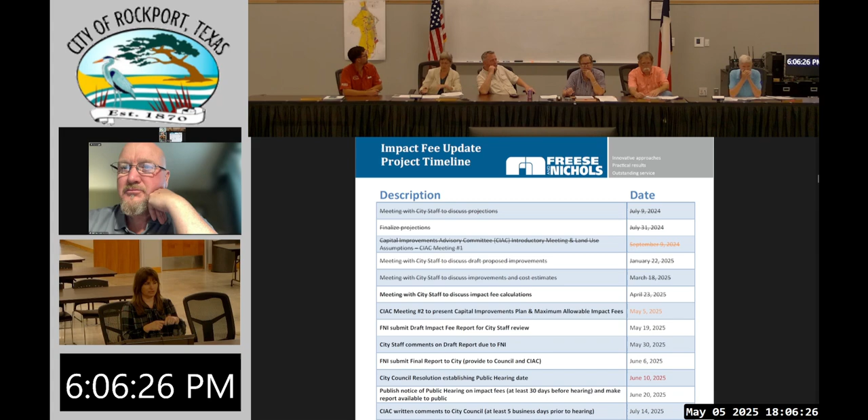To go over the water and wastewater update for the impact fees. If you want to jump to the next slide, that's our agenda. I'll give just a brief review of what we discussed in the last meeting, talk about the capital improvements plan, go over the impact fee calculations, and then finish up with the next steps and project timeline.

So just some basics for those that weren't here. Impact fees are a one-time charge assessed to new development for the cost of anything associated with new or expanded infrastructure. Impact fees cannot be used for any kind of maintenance or operational costs. It all has to be for increasing capacity of the system. Impact fees are developed based on Chapter 395 of the Texas Local Government Code. Those rules dictate how we do this whole process as far as the calculations and the public noticing. By law, it is limited to water, wastewater, roadway, and stormwater or drainage infrastructure. But we are only looking at water and wastewater as part of the study.

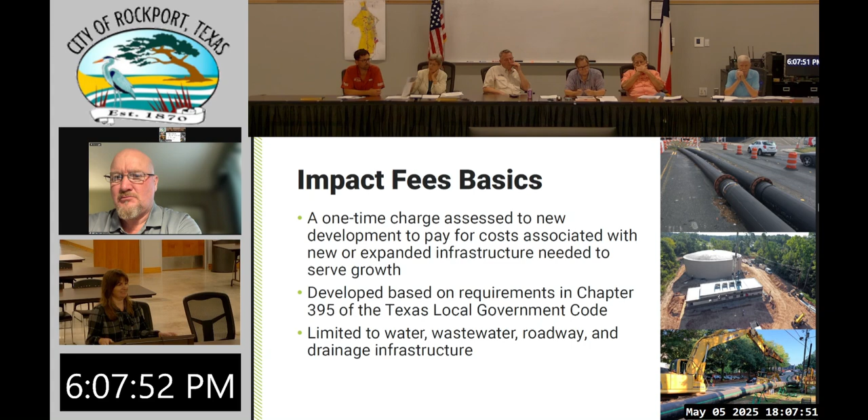Here's an overview of the impact fee process. The first step is developing land use assumptions. That's what we discussed in the first meeting back in September, where we establish our existing customer base, estimate our growth over the next 10 years, and use that to determine our water demands and wastewater flow projections. The next two steps, the capital improvements plan and the impact fee calculations, are what we're going to get into in more detail tonight. That's where we utilize those land use assumptions to determine what projects are needed to accommodate the growth in the water and wastewater system over the next 10 years. For the impact fee calculations, we look at how utilized each of those projects are on the CIP, determine our living unit equivalents, and then calculate what's called the maximum allowable impact fee. So that's all the technical part of the process.

The last two steps are stakeholder meetings. We've had various meetings with city staff to go over projections and CIP. We have these two advisory committee meetings; this is our second one tonight, and then we will do a council presentation as well. We have a public hearing where we have to notice for 30 days, and then we'll have 2 readings of the ordinance to get everything updated.

That's the process. And a reminder of your role as the Impact Fee Advisory Committee. It's really just to oversee the development of impact fees. That's why we're here presenting. You can review the preparation of our land use assumptions and capital improvements plan, and ultimately provide written comments to council. Those are due at least 5 days before the public hearing. So we can track all the comments tonight, and then that will be submitted. Moving forward, there is a requirement to file a semi-annual report on the progress of the CIP. So any questions on background basics before we jump into CIP?

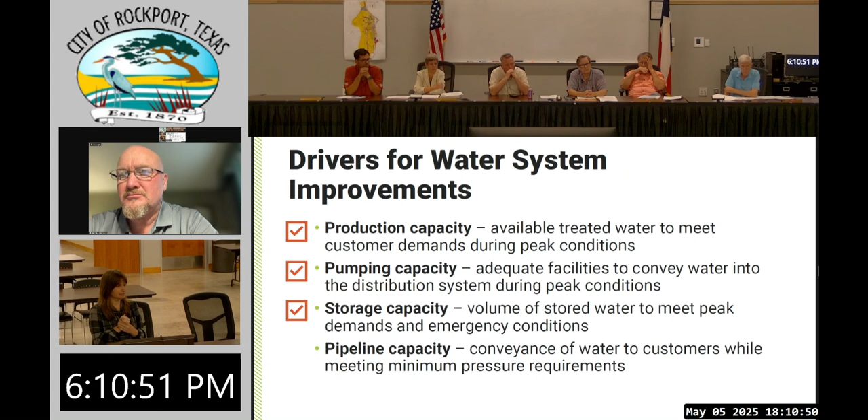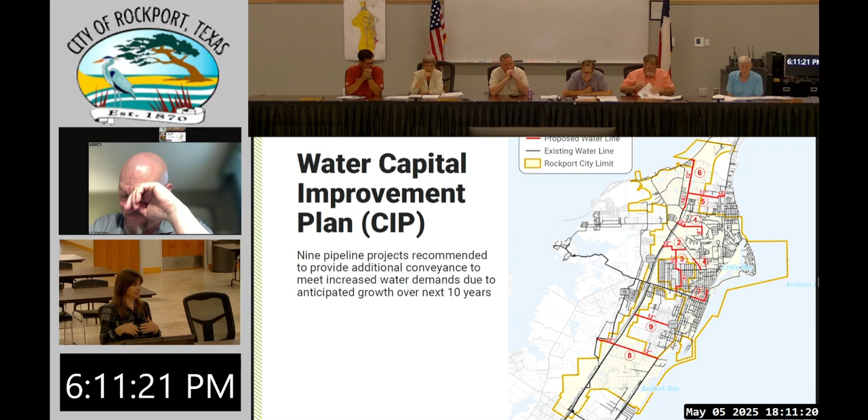So we have 9 pipeline projects kind of scattered throughout the service area, really to extend water service and to upsize some bottlenecks in the system. So we can go to the next one. We'll list all the projects. Oh, we'll get to wastewater, and then we'll go to the list of projects.

So on the wastewater side, again, we kind of looked at 3 components to determine what projects are needed. Treatment capacity, similar to production capacity, the ability to treat and discharge wastewater flows. Lift station capacity, that's when we collect wastewater at a pumping facility at a lower elevation and pump it up to a higher elevation before it can get to the treatment plant.

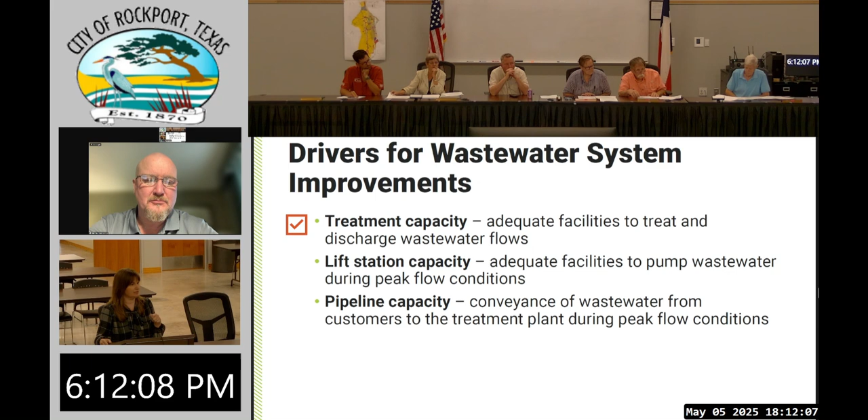And then again, pipeline capacity, so that conveyance network that gets the wastewater from the customers to the treatment plant during peak flow conditions. So you're good on treatment capacity, and you'll see our projects here that we identified are lift stations and pipelines. So again, similar map on the wastewater side. This is the existing system. Everything in kind of the black and gray color are existing facilities and lines, and then everything that's recommended or

proposed is in red. So you can see we have 3 pipeline projects, 3 new lift stations, and 2 lift station expansions that are all needed to serve that growth over the next 10 years. And really the major project is a large interceptor line running along the bypass there that is meant to collect all of the wastewater throughout that service area, so you can avoid these little lift stations that all get built and are hard to maintain.

So we did recommend this more regional type project to accommodate all of the growth in this area. So that's the major project, but there's a couple lift stations too. Yes, sir. Based on the way these are numbered, I'm assuming these are ranked in order of preference? Priority. Yes, for both the water and the wastewater system.

We tried to look at where some of those impending developments are and where the projects might happen sooner. Again, some of that development could change over the next 10 years. But we did look at, if something needs to happen upstream before the downstream project happens, we did order them in that way too. How many lift stations do we have now?

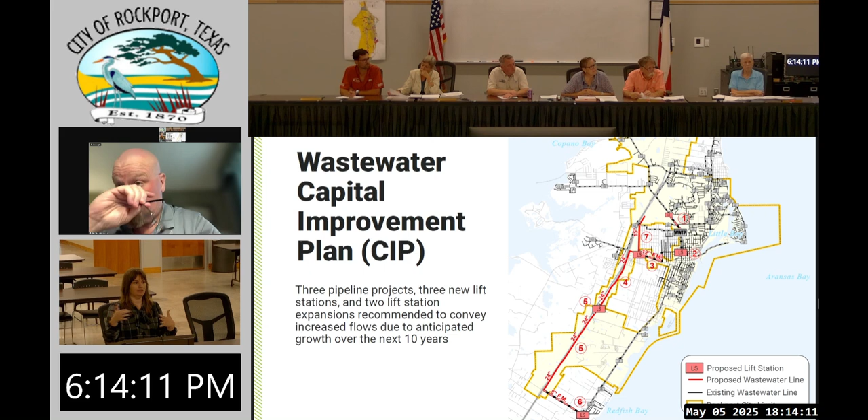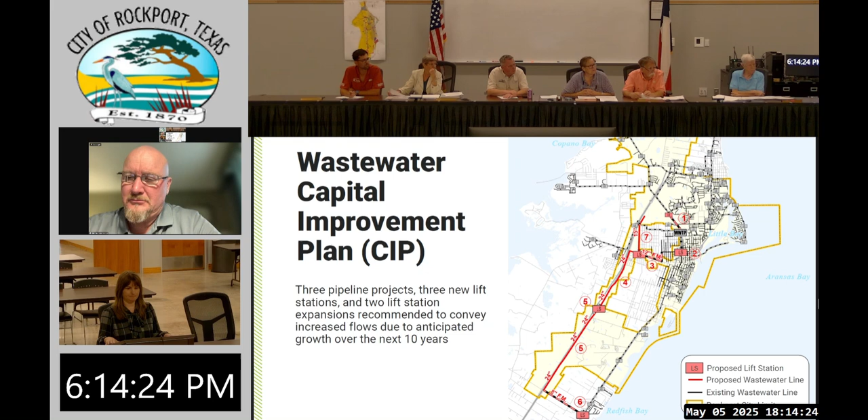And then as some of the development starts happening, because we didn't identify extensions to the specific developments, as those gravity lines come in, you could start to take off some of them depending on where all of that development starts to locate. So if infill comes in these areas, then some of those that are lift stations now can go to gravity, is the plan. Right. And eliminate some of those. Mhm. A lot. Yeah.

Stations are... When you don't have the lines for them to use gravity, you don't have a choice. Yeah, it's really hard when you don't have a lot of elevation change to use the gravity to get the wastewater flow. So you're just real flat, and when you're putting in developments, it's limited.

Before, I think we were limited to a 14-foot depth. But we're not limited to the 14-foot anymore. We can go as deep as we can go. Really? So that changes things, and that helps tremendously. There's a little bit of considerations when it comes to maintenance with how deep you go, and then initial construction cost. But we limited that line, I think, to 30 feet deep. I think 30 is what we did.

Which is still a fairly deep line, but it does kind of get away from having all these individual lift stations for every development that comes in. That's way underwater. Would have to be, yeah. Yeah, there's a lot of work that goes into it, but if we can get those depths, then we can do away with it. That'd be great. Thank you.

Yes, great questions. Anything else on the CIP for water or wastewater? I know you had in your original, for the supply for the water, that production capacity was fine. Looking at, we're coming into a historic drought again, where San Pat is limited on capacity. How are we seeing that reliance, with the other departments feeding off of that as well for a shared source? Have we looked at alternative supply?

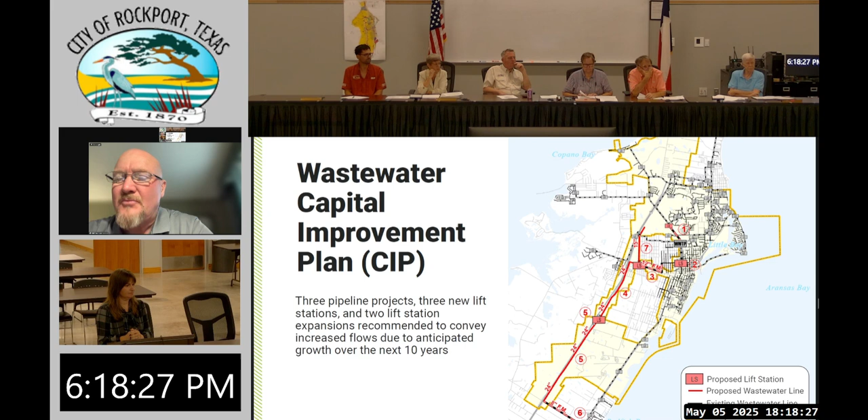Board, am I allowed to ask a question? Absolutely. Well, thank you very much. I appreciate it, and thank you for allowing me to attend via Zoom, traveling for business. My name is Matt Anderson, councilman for Ward 2, City of Rockport.

I want to make sure I understand the gentleman's comment and question, which I think was very good, about impact fees and a 10-year window. If I'm understanding it correctly, the only water supply the City of Rockport currently has is San Pat purchasing it from Corpus Christi, and we're purchasing it from San Pat. We have no wells, no treatment facility.

If something happens in that supply chain, we could be in a little bit of a pickle. Do we want to consider looking at an alternative, not a replacement, but a supplementary way of acquiring water for the residents of Rockport, be it a well with our own small treatment system or something else? And that should be allowed in the impact fee rules if we're just supplying for new development.

As a master planning engineer, yes, I would say you definitely want to look at that. That's kind of what I do every day is look at systems regardless of impact fees and what projects are needed from the various regulations. But for impact fees, it'd be really hard to count kind of a redundant supply and say that that's due to development since you already technically have the capacity there. So it would get a little fuzzy.

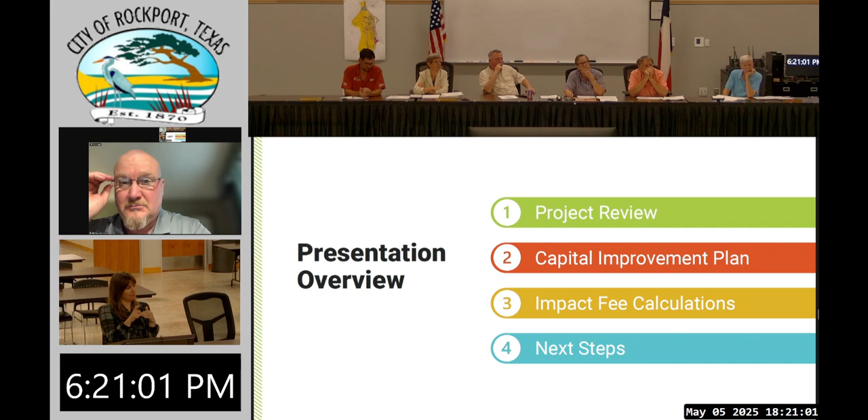if you're kind of going to go with a redundant supply. So if you have 4 MGD that's contracted right now and our maximum day demand is only 3.5 MGD, you're not really quite hitting that. But if you wanted to add another well that was another MGD or something like that, that capacity would be hard to count because you're already kind of covered by what you have existing contracted from an impact fee standpoint.

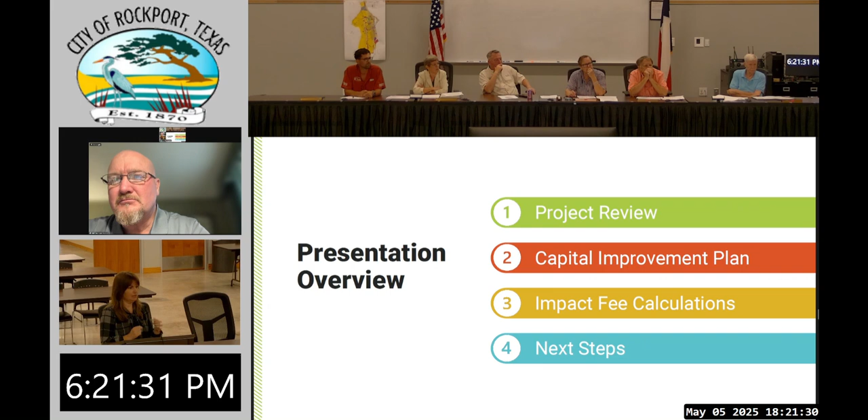From just a straight utility planning, master planning your system, I think that is very good practice, and obviously we're very familiar with different drought conditions, emergencies, things go out, even the electric grid impacts how we get water to customers. So I think overall great plan. It may not be as easy to include in the actual impact fees if you already have the capacity in your system. Not to say it's impossible, it would just take, I think, some planning and consistency on how you apply that to make sure we're being fair to existing and new customers when it comes to impact fees.

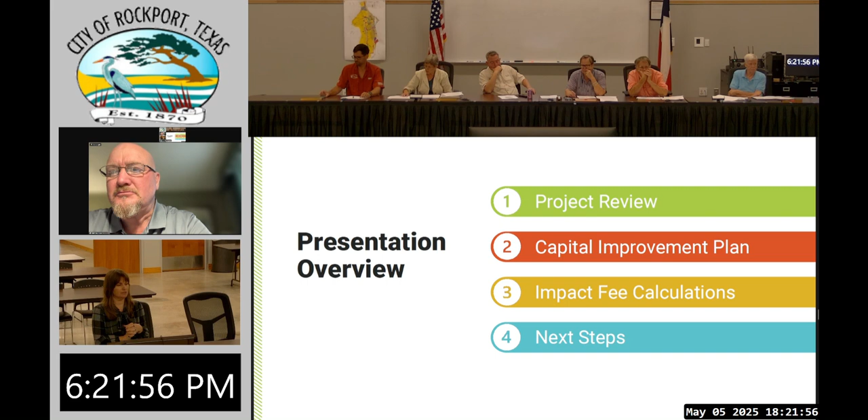All right, great questions. We'll jump into the actual calculations, and some of this might make a little more sense when we get into how we calculate the eligible project costs. So for the impact fees, we only include a portion of the project that's utilized in this 10-year window due to that growth. So we use a hydraulic model and some various planning criteria to determine the existing and future percent utilization for each of those projects that are identified on the CIP.

We also apply a 50% credit as required by Chapter 395. This credit is intended to basically capture the portion of future utility rates that will be used to pay for capital improvements. So we don't want to double charge new customers impact fees and then charge those same customers in their future water rates to pay for those same improvements. So by default, you can use a 50% credit. You can do a more detailed calculation that looks at how your rates go towards capital improvements. But for this study, we did just take the 50% credit.

And then that equation down at the bottom is the basic calculation for impact fees. So we have the impact fee per service unit is that impact fee CIP cost minus the credit, and then divided by our growth in service units. So we'll go over each of those components in a little more detail here.

For the water costs, these are a lot of numbers and kind of small here to read, but you can see our 9 projects are listed there, all of those pipeline projects. The first set of columns is the percent utilization. So we go through and identify any portion of a project that is serving existing customers, and we kind of discount that out of the impact fees. So again, we can't use the portion of a project that is serving any existing customers. It can only be for new customers. So that's what that 2025 percentage column is. Then we also look at how utilized the projects are in that 10-year window due to the growth that we've identified.

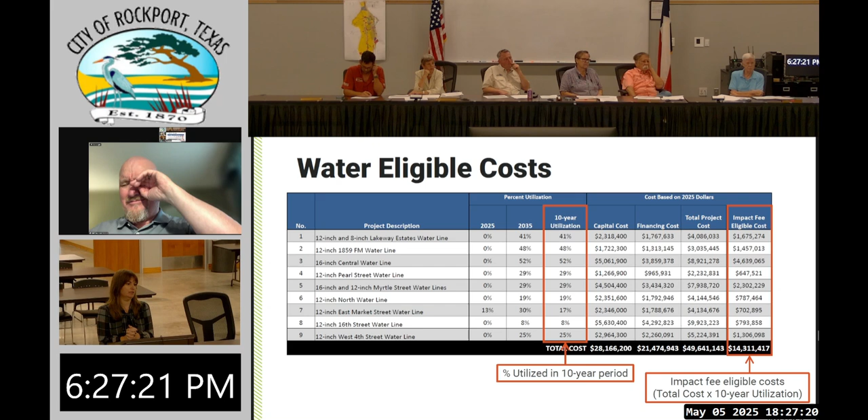I mean, there is a little bit of, I guess, subsidizing the growth, because we are doing the 50% credit, assuming that some portion of even the growth-related projects are in the CIP that the rates cover. If the policy decision is that we don't want existing ratepayers to pay for any new growth-related projects, you could do a credit calculation that basically looks at how your rates are spent and paid for, and if they go towards any projects. That would just skyrocket, wouldn't it? Right, yeah, so we'd be looking at the $49 million instead of the $14.3 million-ish.

I will say that these projects, you can see those percentages, are sized for something further than 10 years. So you can continue to collect impact fees even once a project is installed. If it still has capacity for future growth, you would still keep that on your impact fee CIP and continue collecting impact fees until the capacity for growth runs out. So just because you build a project during this impact fee program doesn't mean we take it off for the next update. We'll continue to assess it, and if there's still capacity for excess growth, we keep it on. But we are assuming that some portion of rates would go towards growth-related projects too in the future.

Does that make sense? So I guess at some point you're going to tell us what this calculates out to. Yes. And really all infrastructure either comes from the impact fees or from rates. So that's the balance of where you set your impact fee. So right now, we're losing money, I take it. Major. We haven't updated in 20 years. Wow. You're going to see a scale in there that shows you what everybody else, because they've been updating, is charging compared to what we charge. We're losing money handily.

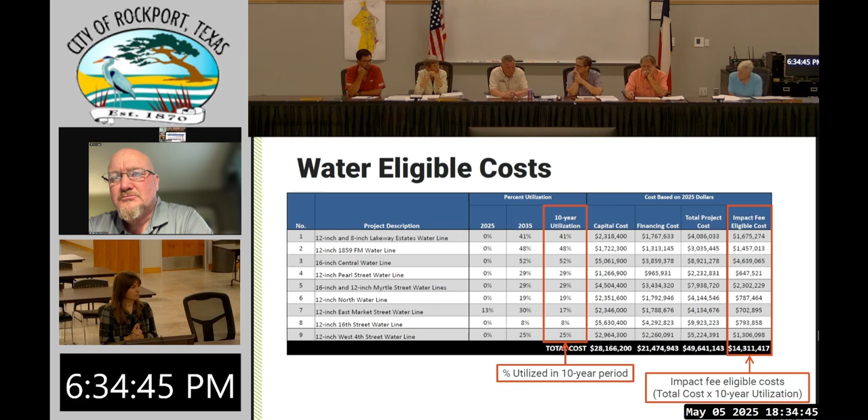Might be a little bit off topic, but the TIRZ, with the way that is done, is there anything different that would affect the impact fees with that? No, that has no bearing on impact fees.

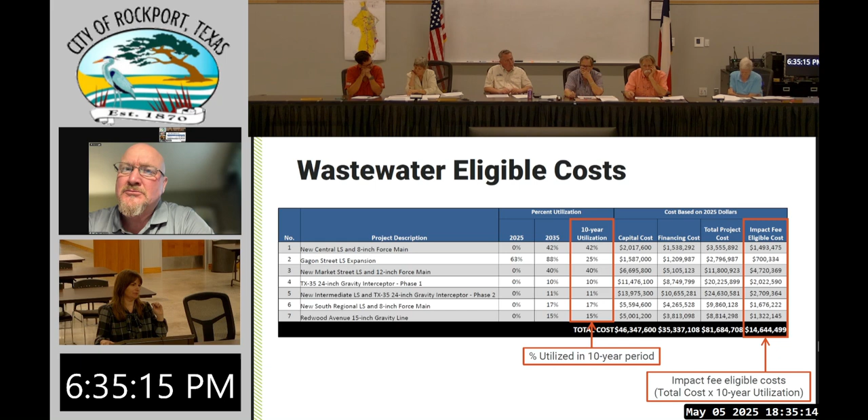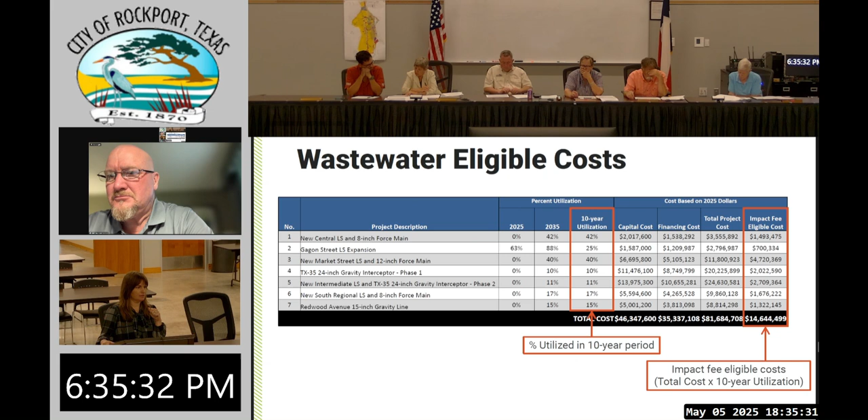We can go to the wastewater table so we can actually see the numbers. So similar table on the wastewater side, you can see our 7 projects here. Again, the same calculations were performed to determine that 10-year utilization. We apply that to the total project cost, and we get that impact fee eligible cost at the end of the table there. For wastewater, we're just over $14.6 million. I think we can probably jump to the next one.

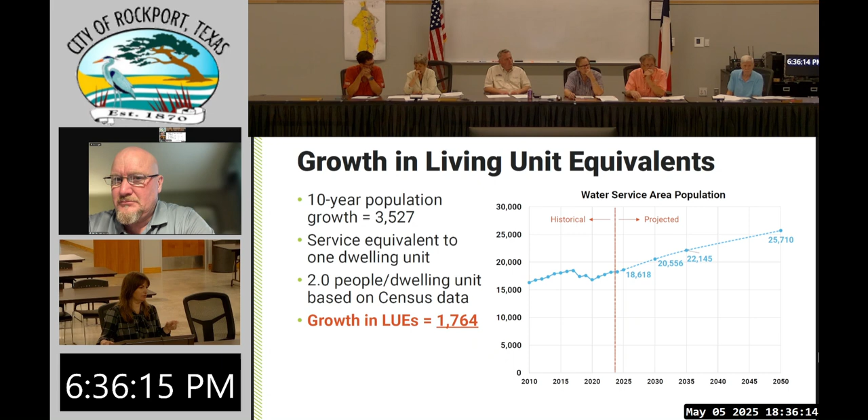So the denominator of the equation, again, is our growth in living unit equivalents. If you remember from the first presentation, we talked about our land use assumptions and identified some annual growth rates and the 10-year population growth of 3,527 people. For impact fees, we define a service unit as one dwelling unit, so that's how we get to these living unit equivalents. We looked at census data and saw that on average there's 2 people per dwelling unit in the city of Rockport. So we took that population growth divided by the 2 people per dwelling unit to get our growth in LUEs, or living unit equivalents, of 1,764.

The next slide are the actual calculations. On the water side, we have that $14.3 million. We apply that 50% credit, divide by 1,764 growth in LUEs to get the maximum allowable impact fee on the water side of $4,056. Current impact fee, as Carrie mentioned, is $674 on the water side. And then very similar numbers on the wastewater side, that 14.6. Again, take that 50% credit divided by our growth in LUEs, we're at $4,150 for the maximum allowable fee on wastewater. And the current impact fee on that side is only $426. So you can see a very significant increase, really due to capital costs and the projects that are on the CIP now. I think the next slide is that comparison.

And I'm gonna be honest with you, I would love to see council approve the full maximum allowed, because these projects are not gonna get done if we don't do something. But they could go 50%. They don't have to approve this maximum amount. Right, that's kind of the ceiling. As the terminology implies, it's the maximum allowable, but the actual assessed fee can be anything up to that maximum. That's a policy decision. Well, I think that will slow down some of the growth.

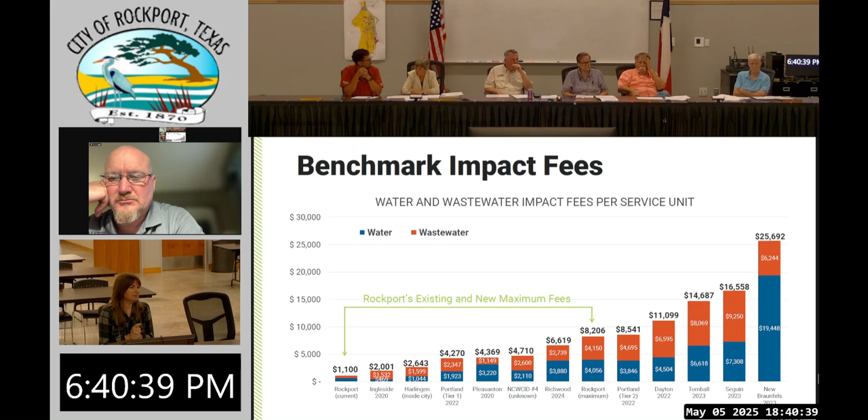It's hard to read some of those cities. Oh, there we go. So you can see kind of a big range. Rockport existing rates are at the very bottom of that at 1,100 combined water wastewater. Ingleside is right there next at about 2,000. Of the various cities, I'd point out Portland. The city of Portland has a tiered structure where their tier 1 is that 4,270, and then they have a tier 2, which is just over 8,500. So depending on where that development is happening, they have kind of 2 different zones that they charge impact fees. But you can see the range.

We tried to point out with those green arrows the current impact fee for the city, and then the maximum allowable at 8,200. And then just to show that big range, we pulled some cities, a few in central Texas that we know of. New Braunfels Utilities is on the high end. They're charging over $25,000 for combined impact fees. There's a few in the state that are up in that range, but most of them are probably more in that middle range.

So the tiered system would let you be lower in one area but higher in another. And I'm just thinking, this proposed thing on Market Street, that could be one tier. I mean, regardless, I understand we're at the low end right now, but if you add another $5,000 or $10,000 to what we're trying to call a low income or affordable house, it's huge. Exactly. Yes, that would add to the cost, definitely. Well, that's something to think about. That's like 3%. Yeah, the tiers, that may be a good way to look at it. Very suspect that we're half of the next lowest, right?

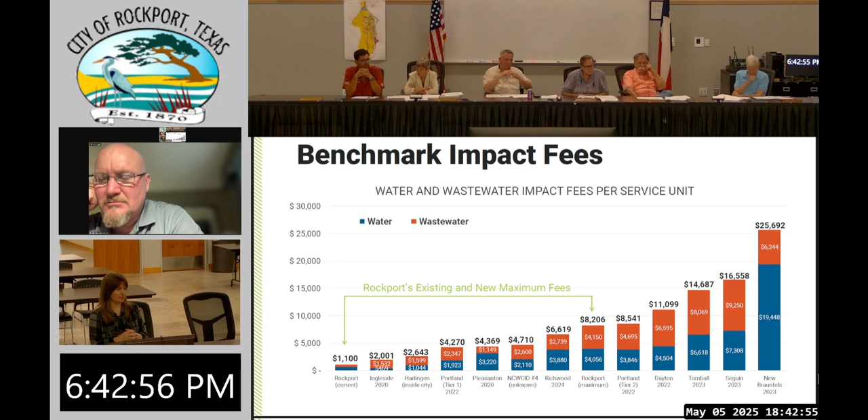For the existing, I'm sorry. The current 1,100 is half of the next. Yeah. The next one is 2,000. But look at these updates. Ingleside updated in 2020. I know because I did it. And they need to get in there and do another update. But Portland did it in 2022 and did the tiers, and I'd really like to look into that. Yeah, how we can do that.

Their tiers, basically in their existing system they have that lower rate, that's tier 1, and then they have a bigger service area where there's very little infrastructure, and that's tier 2 because it's more expensive to extend service out. For that, you can do zoned impact fees a couple different ways. You could actually charge different maximum allowable and only include projects in those zones to really calculate that. Or if you just wanted to carve out certain incentivized areas and you keep everything below the total maximum allowable but have different places that you charge differently, then that is an easier calculation.

Into that. Yeah, for our next project. So, to kind of identify where we want, I don't know. All righty. There's no movement back there.

I was gonna say, are we out of time? Because I forgot to bring tacos.

So yes, I'd really like to get together and discuss that, especially if there's comments towards that, or if council doesn't feel comfortable raising that up, or has different areas of where they want those impact fees to go. I think that could make sense.

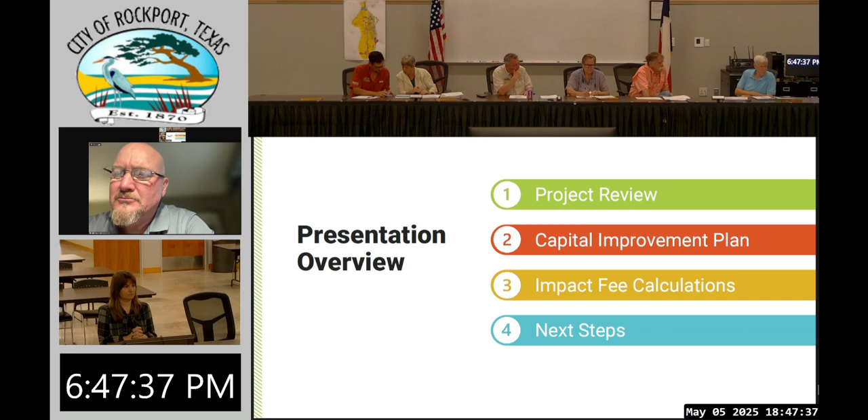Including the tiered system? Well, that'll be a discussion for another time. I think this is just based on the current impact fee update. I think we wanna do a workshop as the advisory committee for impact fees and talk about the tiered system. Definitely. Like she said, if you do a tiered system, you have to keep them in separate accounts, and the monies collected in tier 1 can only be used for projects in tier 1. So that's something I wanna get together with Stephanie and talk about.

So what's the comment you're wanting from us now? Basically, tell me how you feel about this update, and do you recommend for the council to go the full raise, 50% of the maximum? What do you think they should do? We will have a report too.

If you go to the next one, it'll show some dates here. So we've done our 2 advisory committee meetings after tonight. We're gonna submit our impact fee report, so you'll have a chance to review that beginning of June. And then we are slated to go to council to consider setting the public hearing date on June 20th, where we'll just have that resolution, and then setting the public hearing for July 22nd.

So that puts your written comments due to council on or before July 14th. So you'll have a little bit of time to see the report. If there needs to be additional discussion or emails, they just need to go to council 5 days before the public hearing. And also, the public hearing has to be published 30 days before the actual meeting date, and we have to have the report available to the public in case anybody wants to see the calculations. Let me back this up. So we need to.